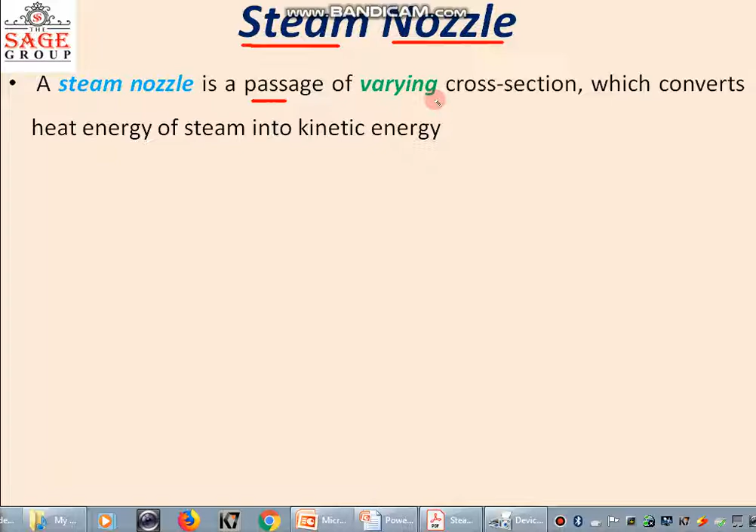A steam nozzle is a passage of varying cross section, which converts the heat energy of steam into kinetic energy. Since the mass of steam passing through any section of the nozzle remains constant, mass doesn't change. It is constant throughout any section.

The variation of steam pressure in the nozzle depends upon the velocity of the steam, its specific volume, and the dryness fraction of the steam. A well-designed nozzle converts the heat energy of steam into kinetic energy with a minimum amount of losses.

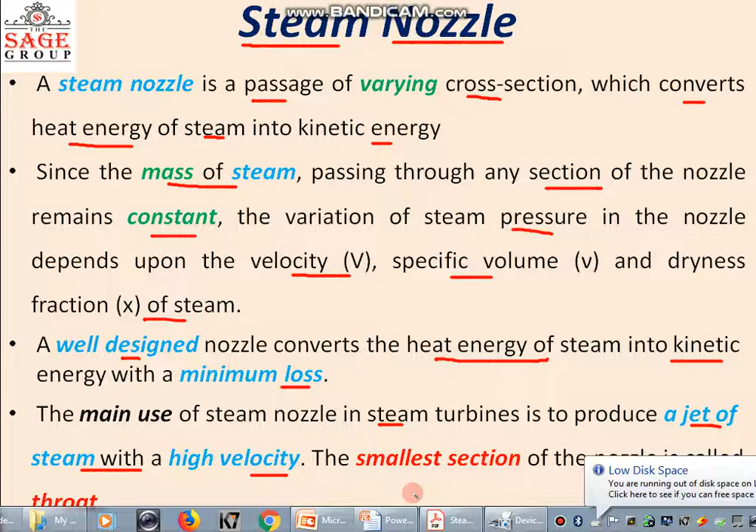The main use of steam nozzle in a steam turbine is to produce a jet of steam with high velocity. High velocity steam jet is required in the steam turbine to get the maximum power in the turbine rotor, and the smallest section of the nozzle is called the throat section.

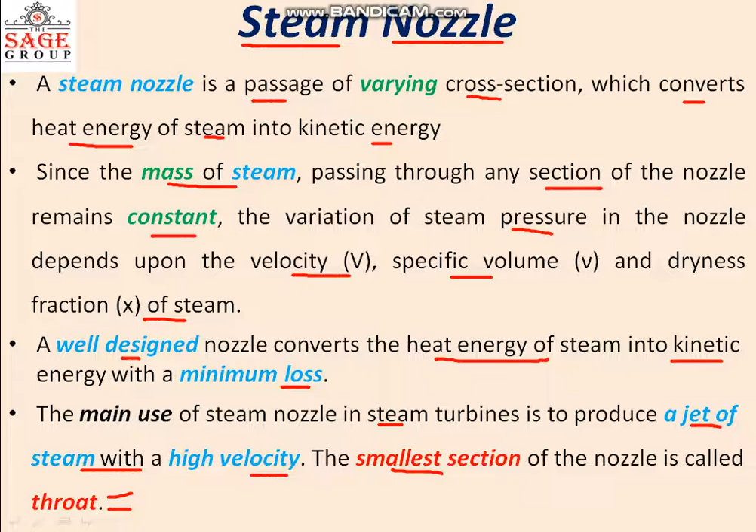Now the flow of steam through the nozzle. How does the flow of steam occur? The flow of steam through nozzles may be regarded as adiabatic expansion. Adiabatic expansion means that there is no heat transfer between system and surrounding.

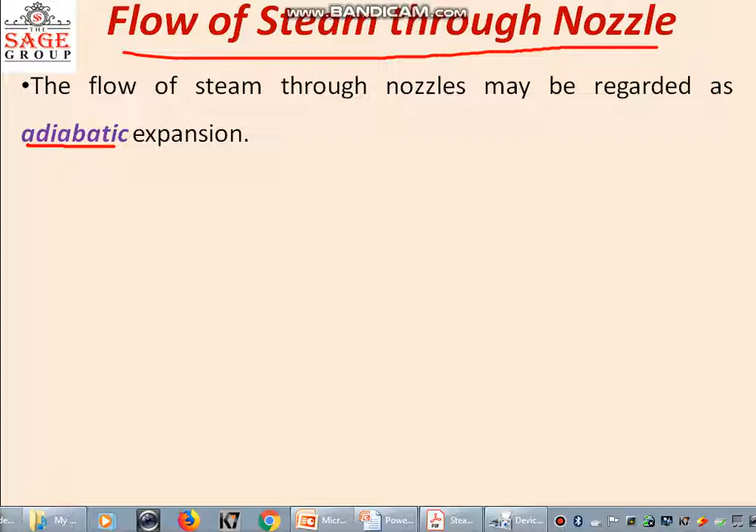The steam has a very high velocity at the end of the expansion, and the enthalpy decreases as the expansion takes place. So when the expansion in the nozzle takes place, there is always very high velocity achieved at the end of the expansion, but there is friction which exists between the steam and the sides of the nozzle, and because of this some heat is produced as a result of the resistance of the flow of steam in the nozzle.

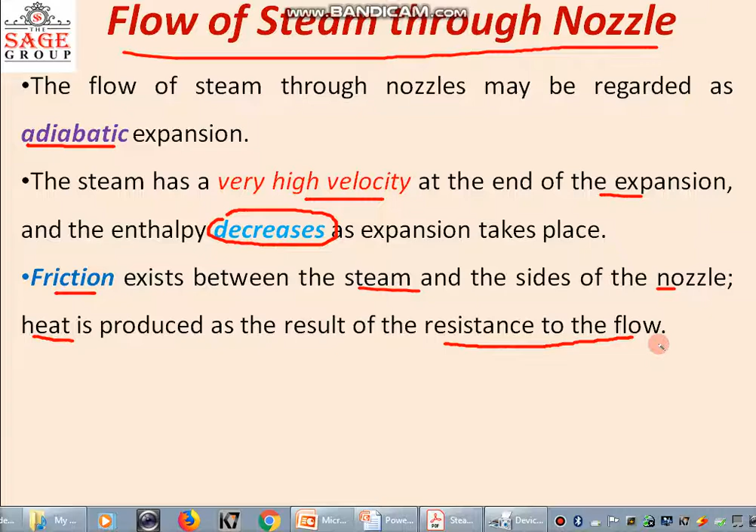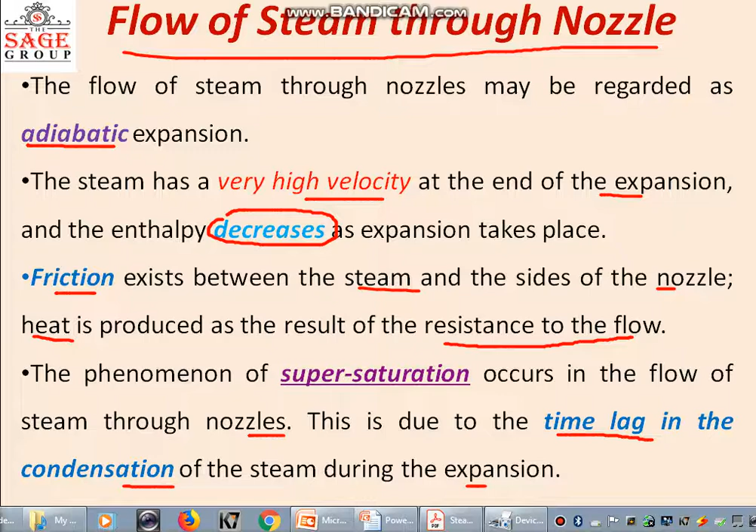The phenomena of supersaturation occurs in the flow of steam through the nozzle, and this is due to time lag in the condensation of the steam during expansion. So if there occurs a time lag, it causes a phenomena known as supersaturation. You will understand what is supersaturation.

In supersaturation, as steam expands in the nozzle, its pressure and temperature drop, and it is expected that the steam starts condensing when it strikes the saturation line, but this is not always the case. Owing to the high velocities, the residence time of the steam in the nozzle is small, and there may not be sufficient time for the necessary heat transfer and the formation of liquid droplets.

Consequently, the condensation of steam is delayed for a little while. This phenomena is known as supersaturation, and the steam that exists in the wet region without containing any liquid is known as supersaturated steam.

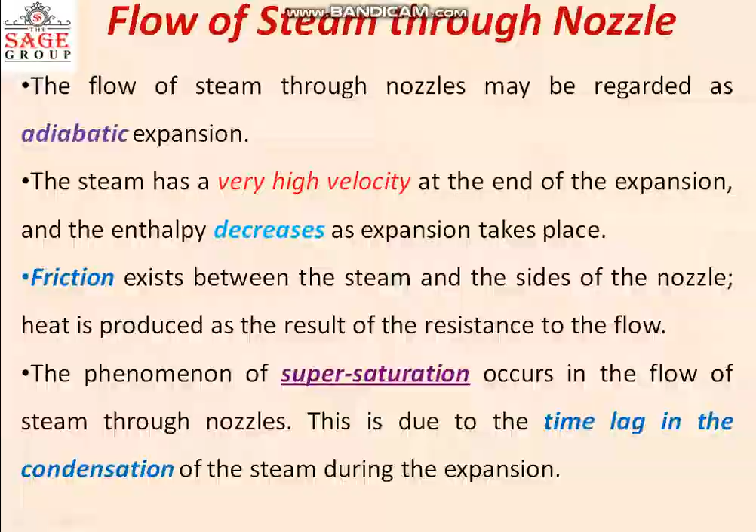Now there are different types of nozzles. We generally use three types of nozzles, which are the convergent type of nozzle, divergent type of nozzle, as well as convergent-divergent type of nozzle.

In these three cases, what we are seeing is that in the first case, the area of cross section from the inlet to the outlet decreases, and this type of nozzle is known as the convergent nozzle.

In the second case, when the area from the inlet to outlet increases, this type of nozzle is known as a divergent type of nozzle.

And in the third case, the area from section 1 up to section 3 decreases first, and then the area from this section 3 to the outlet section 2 increases. Here the minimum section area is known as the throat section or the throat.

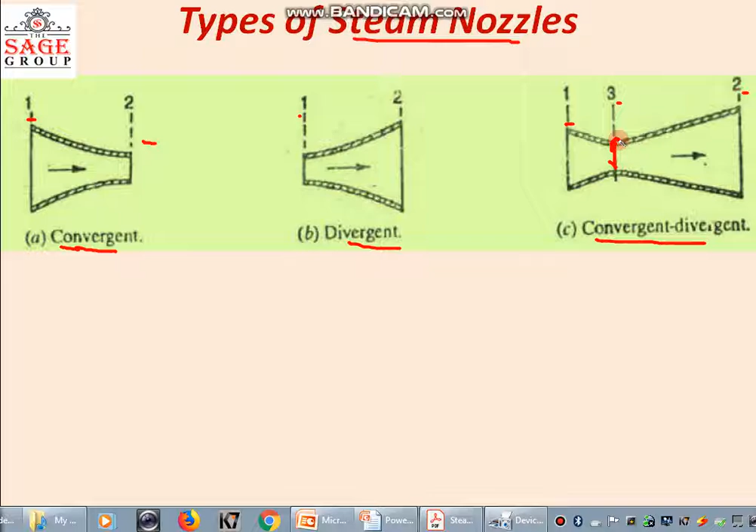In the convergent nozzle, the cross section area decreases continuously. In the divergent nozzle, the cross section area increases continuously from entrance to exit. In the convergent-divergent nozzle, the cross section first decreases from entrance to throat and then increases from throat to outlet. These are the three types of nozzles generally used for different applications.

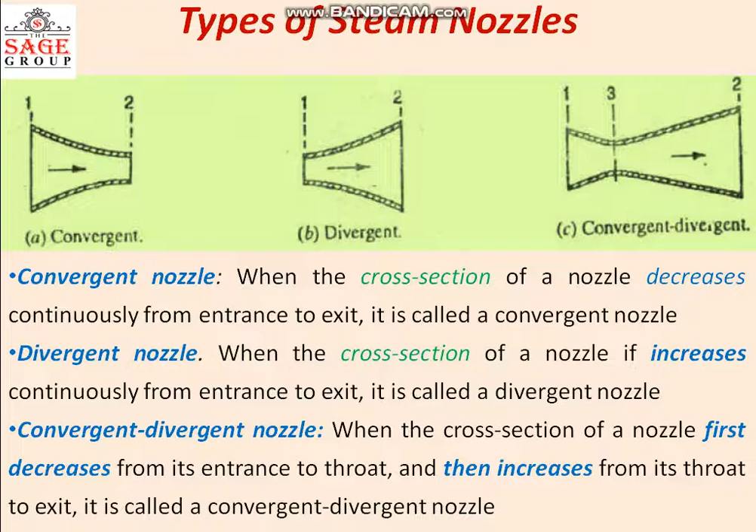Now the next topic is flow of steam through convergent and divergent nozzles. The steam enters the nozzle with a high pressure but with a negligible velocity.

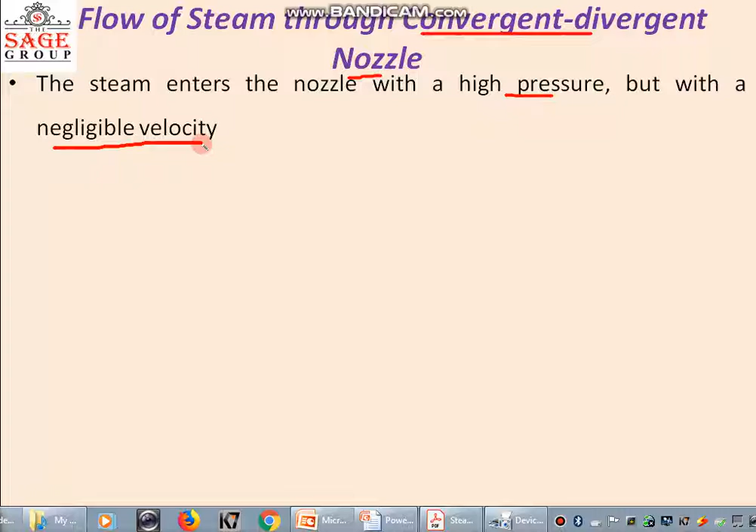In the convergent portion from the inlet to the throat, there is a drop in the steam pressure with a rise in velocity. There is also a drop in the enthalpy or total heat. So in the converging portion, from inlet to throat, there is a drop in steam pressure with an increase in velocity.

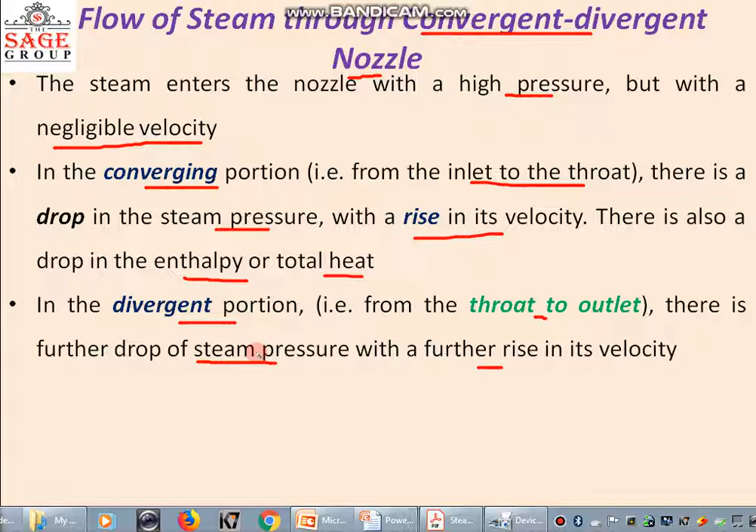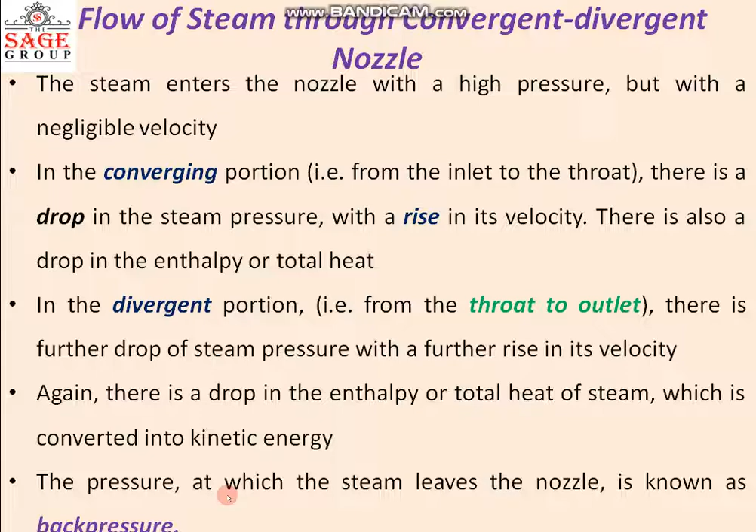In the divergent portion, from the throat onward, there is a further drop of steam pressure with a further rise in velocity. So in the divergent portion also there is pressure drop and increase in velocity. Again there is a drop in enthalpy or total heat of the steam, which is converted into kinetic energy. The pressure at which the steam leaves the nozzle is known as the back pressure.

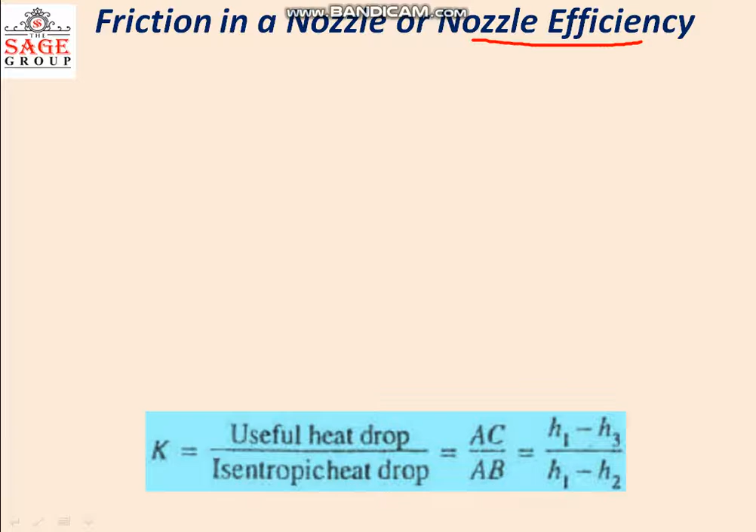Now, friction in nozzle or nozzle efficiency. When steam flows through a nozzle, some loss in enthalpy or total heat takes place due to friction between the nozzle surface and the flowing steam.

The heat drop H1 minus H2 is known as the isentropic heat drop, and the actual heat drop is H1 minus H3, the useful heat drop. So the nozzle efficiency, denoted by K, is defined as the ratio of useful heat drop to the isentropic heat drop. It is also the ratio of line AC to line AB, which equals H1 minus H3 to H1 minus H2.

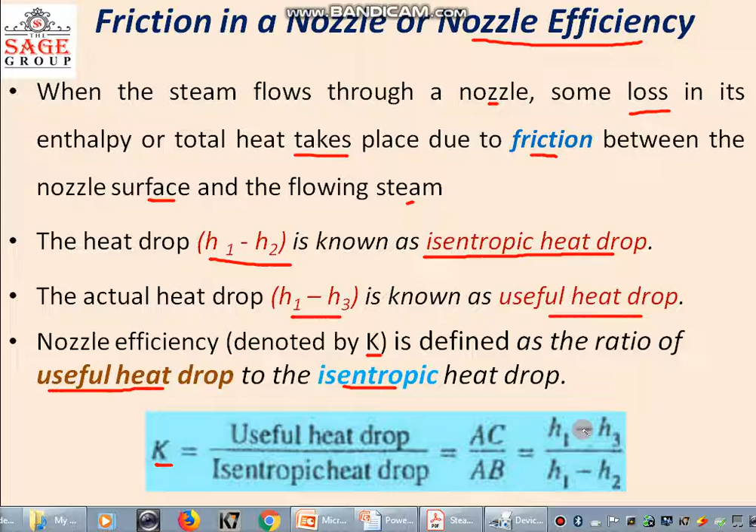If the initial condition of the steam is dry steam, then it follows the line A to B, which is the isentropic expansion, but the actual expansion follows the line A to B dash. So A to B is the isentropic expansion, with enthalpy drop H1 minus H2, but the actual heat drop from A to C is H1 minus H3.